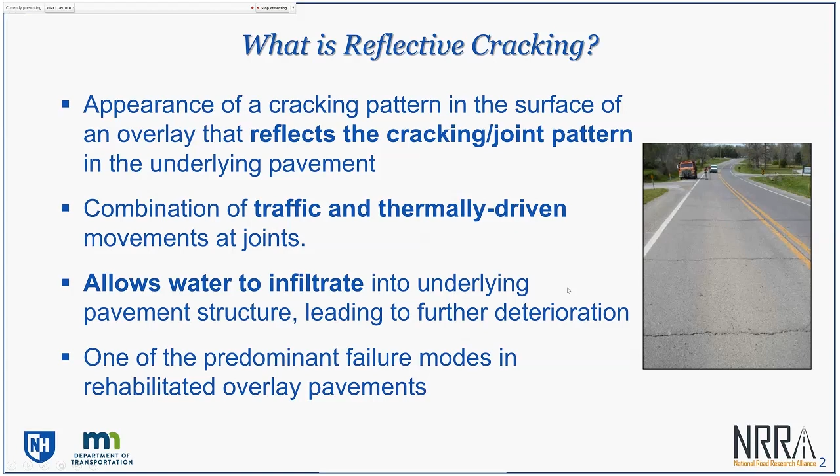So that is really what we are trying to address.

Now, when this project was developed, there was another topic that the flexible team was also looking at, and that is tied to in situ density of asphalt mixtures. What ended up happening was, because of the way the test sections are constructed at MnROAD, and also since there's quite an extensive amount of performance testing that has already been conducted on these mixtures, it was decided...

...that really both of these objectives, not only the objective on selection or decision tree for overlay selection and reflective cracking performance, but also the objective in terms of how in-place density of asphalt mixtures impacts their performance, including trying some of the newer volumetric concepts to get better densities in our asphalt mixtures, those two really merged and ended up being this single project in which we are looking at both of these things simultaneously. And as we go through this presentation, you'll see how we are doing that assessment.

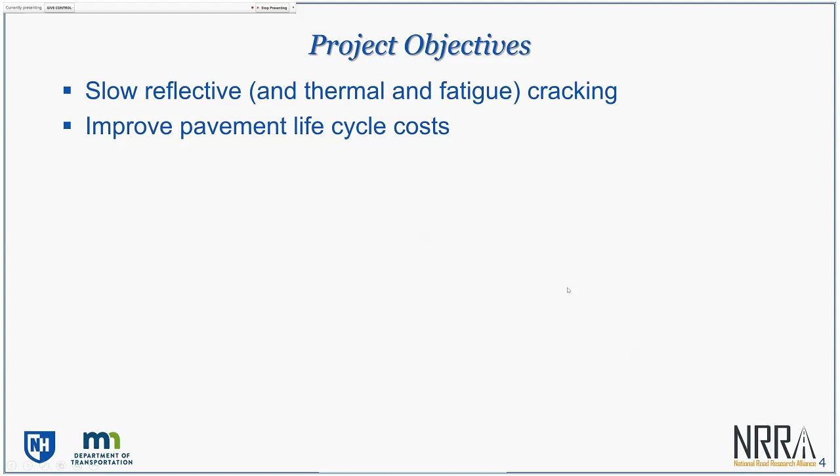So overall objectives, and I've already touched on these. Obviously, we want to get better reflective cracking performance from our overlays. And the consequence of that would be an improvement in pavement life cycle cost, which is tremendously important in today's economic climate in terms of agency budgets, where we are constantly trying to stretch our investment as far as possible.

But on top of that, there are also multiple side benefits or additional objectives that this study focuses on. One of them is looking at what kind of laboratory-based performance tests are able to better capture reflective cracking performance. Obviously, there's already multiple efforts throughout the US on performance tests, including the MnROAD NCAT partnership, which is also looking at cracking performance tests, as well as rutting and other distresses.

But since in this project there was already a component that dealt with doing extensive lab performance testing by all the different agencies and associates, it was considered that since we are going to have field data, we might as well do this comparison and develop additional knowledge through that. We will also be looking at constructability considerations and time considerations, especially in context of various performance tests. So that's another side advantage, where we are collecting data on how long it takes, what's the turnaround time on some of these tests, and so on.

Again, this is not a unique effort, as you are most likely very familiar at a national and international level. There are a number of studies doing this. We are just trying to provide additional information on these topics since we have access to the data.

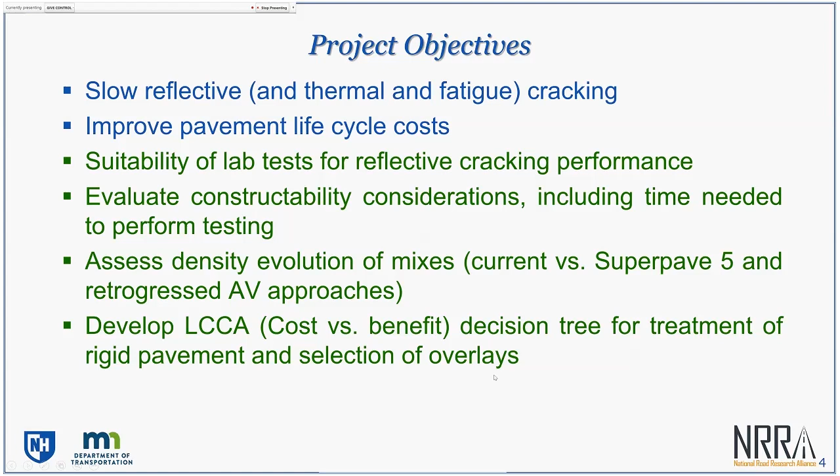And then lastly, as I mentioned before, the overall outcome is really going to be a decision tree tool that agencies can adopt, where it takes as input your existing pavement condition and gives you different scenarios. So if I choose this material and this thickness, what is really my life cycle cost associated with that overlay decision? That's really the outcome, and that's why we will be working quite extensively on this project in the second and third year, developing performance curves that various pavement management systems can adopt. So those are the objectives.

I'll very quickly go through pavement sections and materials. I won't spend too much time on it because many of you have seen this information before. But essentially, there are 12 different sections that are part of this study. And really what is changing between those sections, there are multiple things, but the key things that are changing between these sections are your overlays.

They are changing in terms of thicknesses, also in terms of mixes—not just air void levels, but also to some extent different gradations. Several of these sections also have interlayer treatments or another asphalt layer between the traditional overlay mix and the concrete slab, and construction technique as well, where several were constructed using a spray paver, doing a thin bonded overlay type of construction technique, where you can get a higher tack coat application.

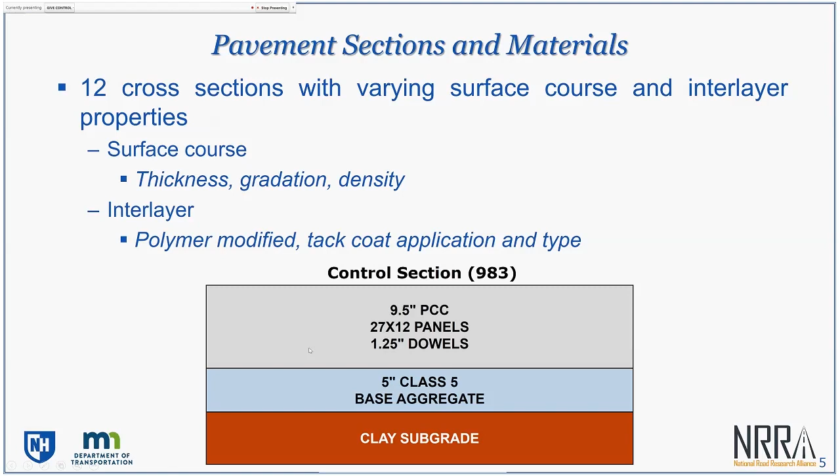One thing that's wonderful with the MnROAD facility and through this NRRA effort is that we have excellent documentation of pavement conditions. We already have load transfer efficiencies before construction, and distress surveys before construction, and then obviously these sections get monitored. That's really what's helping us develop these decision trees, because without that kind of information, we won't be able to do it. So there are various cells, and I have them grouped in a way.

The first cell is what I call my baseline overlay type of cell: 2.5 inches of 19 millimeter mix right on concrete, then 1.5 inches of wear course, which is 9.5 millimeters, so 4 inches total overlay thickness—that's what we use more as a baseline or control overlay. Then to compare to that, you see 4 more cells here.

What's really changing between these cells—if you see the course going right on top of concrete, they are all 2.25 inch, that's not really changing. But on the surface you can see 4 different mixes, where now we have our traditional 1/2-inch mix with 4% air void design level—that's your standard Superpave mix. Then cell 989, the only difference is instead of that standard Superpave mix, this one's designed as a Superpave 5 mix.

The Superpave 5 mix is designed to have a 5% air void level, and in-place air voids also around 5% at the time of construction, as opposed to a typical 92% or 93%, meaning a 7 or 8% air void level. So higher in-place density at the time of construction, but higher air void level as a design mix.

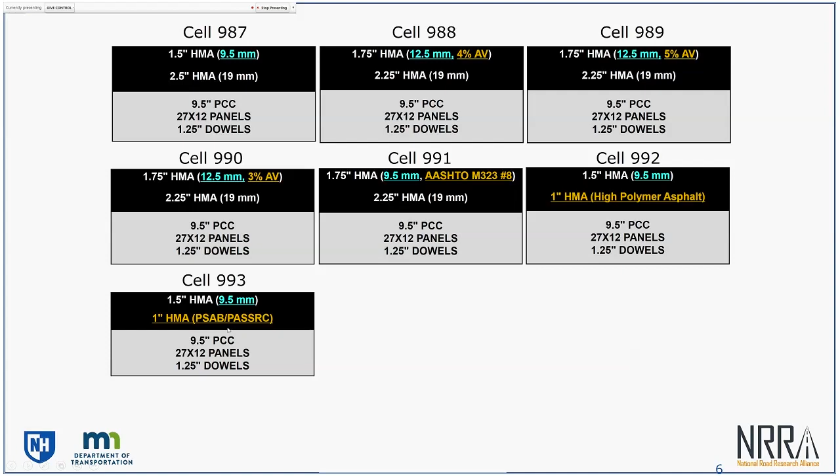Then the next four—984, 985, 986, and 994—are all actually focusing on tack coat and construction technique, where they are all 1.5-inch overlays but placed with different application of the tack coat between the concrete and asphalt layers. In the case of 986, that one is actually placed with a spray paver doing a thin bonded overlay, or a bonded overlay with a high shot rate on the tack coat emulsion of 0.1 gallons per square yard, versus 984 which is a more traditional shot rate of 0.08, and 985 a lower than traditional rate of 0.05—these are undiluted rates, rather diluted rates, so the actual emulsion amount is even lower, but this is with dilution.

Lastly, cell 995 is a true ultra-thin bonded wear course with a very high tack coat rate of 0.2 gallons per square yard. In that case, the tack coat is also a polymer modified emulsion, made with polymer modified binder. So those are the different cells, and that's going to help us populate all the information we need toward developing these decision trees.

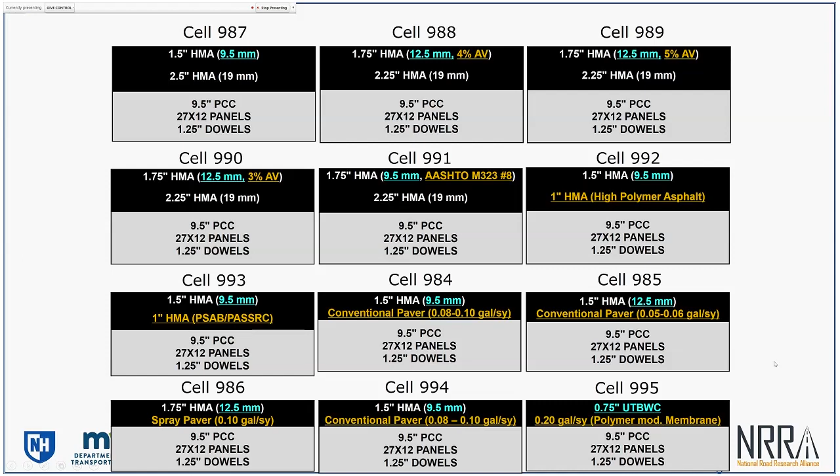This research task is really 8 different tasks. We are still in the early part of the project. We finished the literature review and submitted it. You can access it on the NRRA website.

Task 2, we are collecting data on performance of these overlays. We already have lab testing data from all the different partners who have tested these mixes.

Task 3, we have started groundwork on it. Officially it kicks off at the start of next year, and that's where we will be making mechanistic models of these overlays, then calibrate those models using MnROAD data to make sure they are reliable. Then we will be able to run a lot of what-if scenarios, like what if I increase my overlay thickness by half an inch, or reduce it by half an inch but use some kind of polymer modified mix, and so on.

So that's where we will develop a large enough data set to feed into tasks 5, 6, and 7, which is where the decision tree essentially gets developed. Task 5 is the critical one, and 6 and 7 are more about building tools that use that knowledge.

Task 4 is the side, or parallel, project where we are really looking at, for these mixes—especially ones designed differently than the traditional Superpave approach—how asphalt density changes with time, and what impact that has on reflective cracking performance.

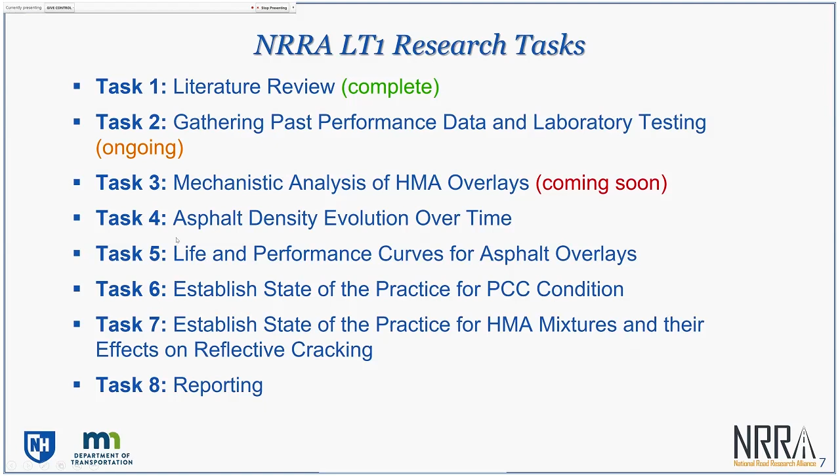On the literature review, I won't spend a lot of time. As I said, we've already submitted this to the flexible team, and you can go online to learn more about it. We looked at all the different models and tests out there for reflective cracking, and also did quite an extensive review of what these enhanced density approaches are doing.

We reported on work done extensively in Indiana, where they are seeing very good responses with the Superpave 5 approach in terms of pavement performance—not just for cracking, but also from a durability perspective.

Reflective cracking, as we know through Pavement ME and the associated NCHRP project, is a challenging problem that requires a quite extensive mechanistic approach to simulate and predict performance reliably. So we are taking approaches similar to what was done in the initial development of Pavement ME, with certain variations. I don't have time to go into those in this presentation, but I'd be happy to discuss if you have questions or want to contact me.

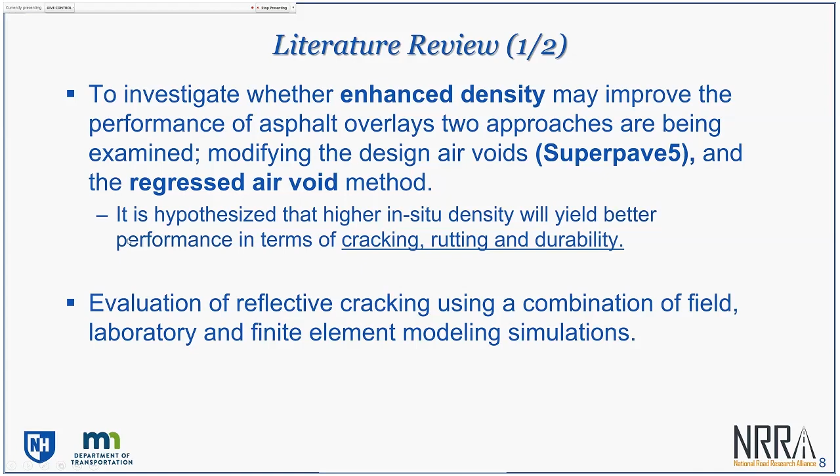On the LCCA side, as you're probably familiar, there's been a lot of recent work on this topic—especially kicked off by the NCHRP 1-45 study, which showed that vehicle fuel efficiency depends extensively on pavement roughness. Our approach here is to start with FHWA's RealCost software, which allows us to incorporate all the different effects.

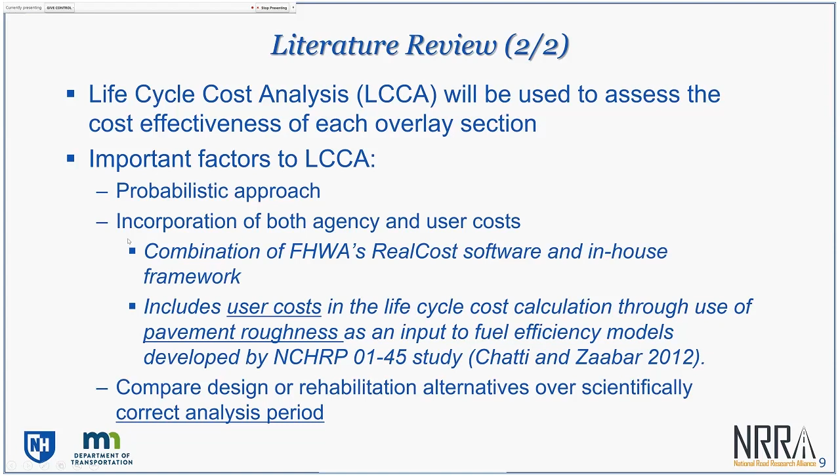We're also keeping track of cutting-edge research on this topic, and we have internal projects going on as well that give us a better handle on user cost—things like user delays, crash propensities, lost revenue for businesses, and so on. So we will be bringing those components into the LCCA module as well.

Just a quick list of all the different mix tests that have been conducted on these asphalt mixtures at MnROAD. Again, this is something you've probably seen before, since Ben and others have presented this information multiple times to people interested in NRRA activities.

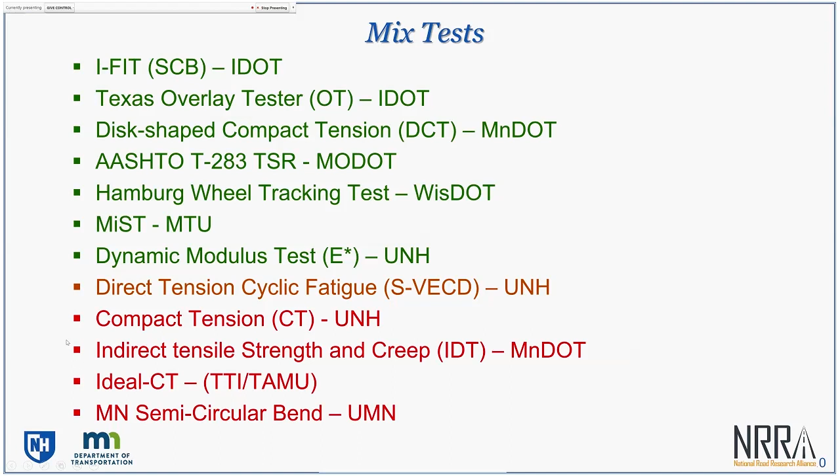To bring things up to speed: everything shown in green is already tested—we have data. Things in orange are currently being tested, and there are certain additional tests that got added later on, so we will be receiving some of those results. The UNH one is part of our contract, so we will be doing that; the others depend on how much time, mix, and availability there is for agencies and associates. They may or may not happen.

For how we are comparing these mixes to performance, and also mix performance properties to mix properties such as volumetrics, we are relying on statistics—specifically a technique using Pearson's correlation coefficient, or Pearson's correlation matrix approach.

It's really a very simple technique that statistically looks at what impact one category of variable has on another category of variable. For example, what impact effective binder content has on any of the performance properties we saw on the previous slide. It's very straightforward: if your correlation coefficient is positive, that means as X increases, Y also increases, and vice versa. Zero means there's no correlation between those two properties.

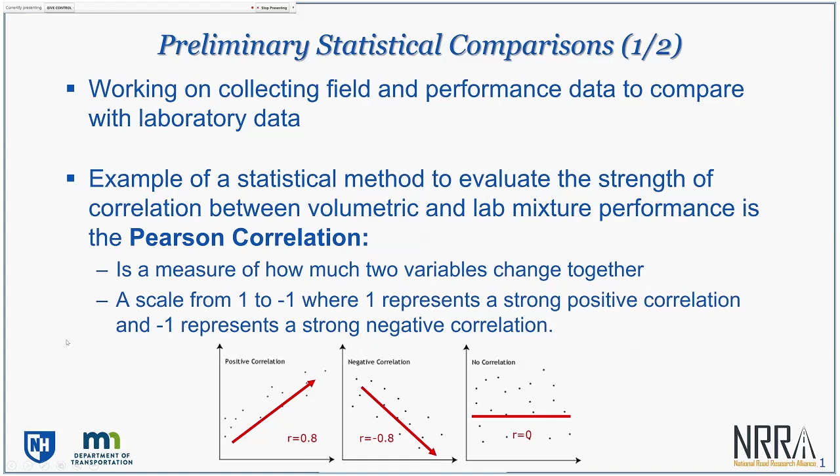These are very early results. I don't want you to get bogged down on all these numbers on the slide. I'll just focus on some of the key points I have at the bottom of the slide.

If we look at effective binder content, as this property increases, what we are seeing is that in general overlay tester results and indirect tensile strength - this is ITS at 25C from TSR, not the Superpave IDT at low temperature - those properties are decreasing. So that's somewhat counterintuitive, because typically you'd expect higher binder content to have better performance.

What we are also seeing is tests for durability, such as MIST and TSR, increase with binder content - not necessarily surprising. Also things like DCT fracture energy and Hamburg results on rutting were both improving with increasing effective binder content.

On the air void side, we saw that increasing air void was resulting in lowering of your durability, which also makes sense, but also lowering of your fracture energy, versus on the overlay tester side, increasing air void was resulting in improving of overlay test results and indirect tensile strengths.

That's fairly early, so I don't want to spend too much time on those, because really what we will be doing is making these type of comparisons between field performance and these properties, rather than these properties and volumetrics only. I just have a couple more minutes and a few more slides, so I'll go through these fairly quickly, but just some more results from the lab.

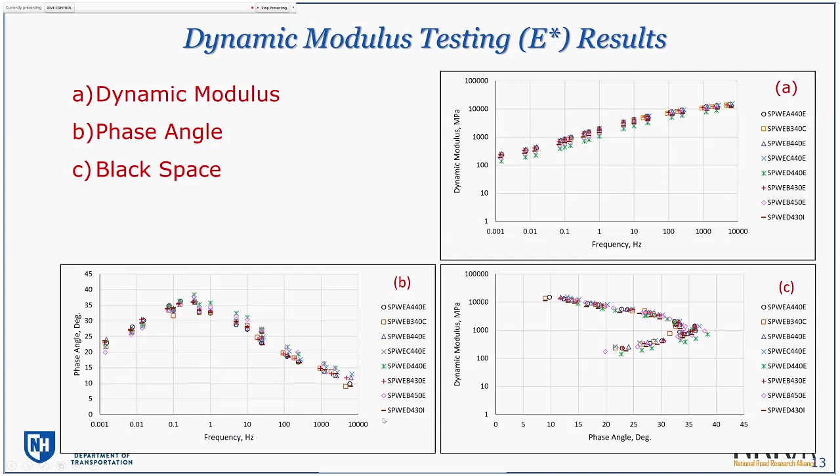So what I'm showing you here are dynamic modulus or complex modulus results. This is just to demonstrate the extent of data that we have. I'm not really trying to make any points here.

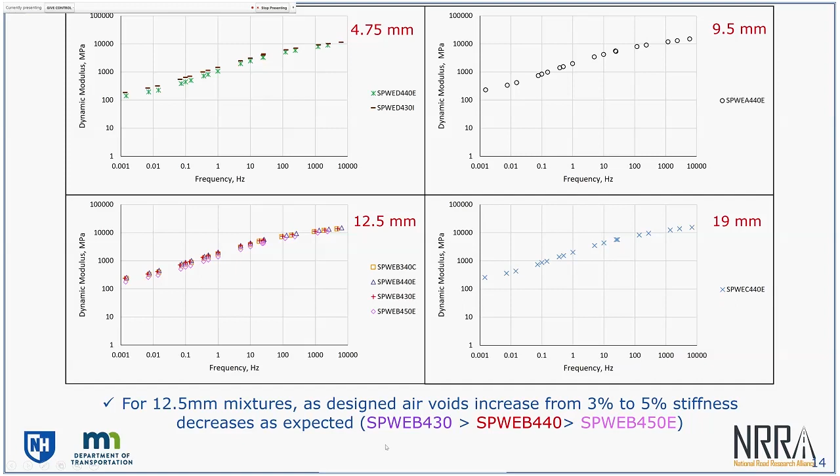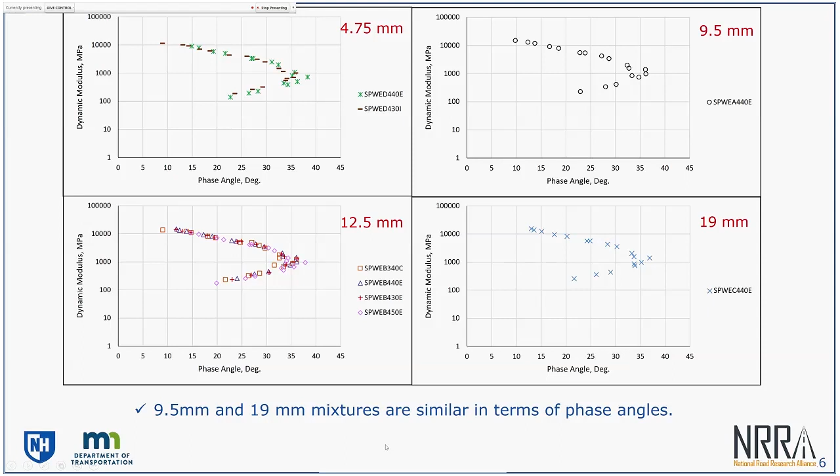We are also using tools like Black Space, which FHWA has recently started to promote for use in performance-related specifications. This is really a good way to look at full linear viscoelastic characterization of mixes. Again, this is more for demonstrating the breadth of the data. I am not trying to make any specific conclusions on this one slide, but it allows us to look at all this data in different ways.

So just wrapping up, what are we doing now? Right now we have a survey out to all the pooled fund states that are members of NRRA, and what we are trying to collect is all the information we can get in terms of how they currently design their overlays or decisions they use. If they have any performance data, we will need cost data for life cycle cost analysis, and also getting more information on their correct contact people, because it's not usually the same person who has answers to the first three items here. So we are also collecting that.

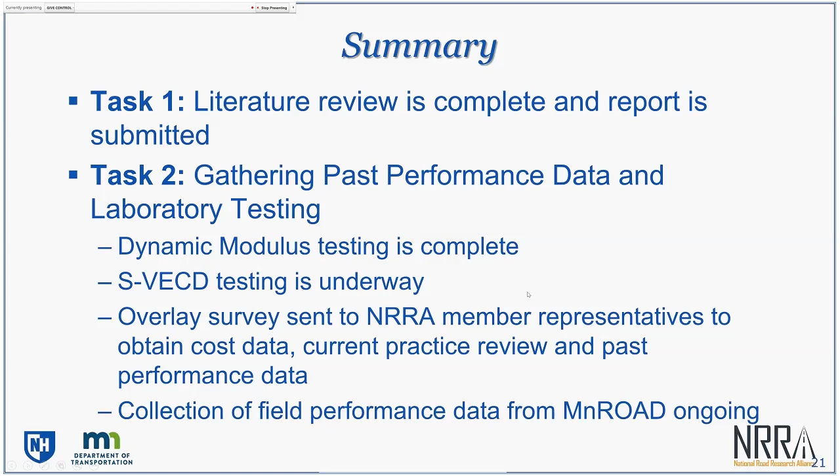Anybody in the room? And I did get a note from Dave Van Deusen, so I do have a correction that I'll make in the map with different cells. So we'll take care of that. Thank you, Dave, that's pretty good. You can read your emails while you talk. Yeah, try to. Multi-talented guy.

I guess, again, just to kind of highlight what you said, Eshan: this study and other studies that NRRA is doing is trying to not only utilize MnROAD data, but also get at the whole aspect of what states are doing, and that's where the surveys come in. It's important to get that information to make this study as good as it can be. So just kind of backing up Eshan, that request for data is very important. Thank you very much.

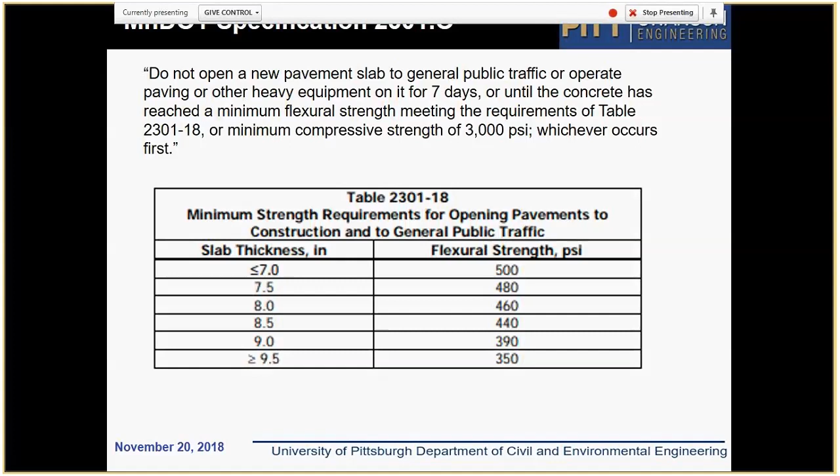Let me start by reminding you that the current spec says the pavement can be opened to traffic when the concrete reaches 3,000 psi compressive strength, or flexural strength from 350 to 500 psi, or 7 days. But basically these criteria are overly conservative. We know it, and actually the American Concrete Pavement Association proposed different guidelines, saying that especially for low-volume traffic and strong subgrade, you can have a flexural strength of 300 psi and that should do the work. But all the previous work was done with old mixes, and there was very little experimental verification for that, especially full-scale verification.

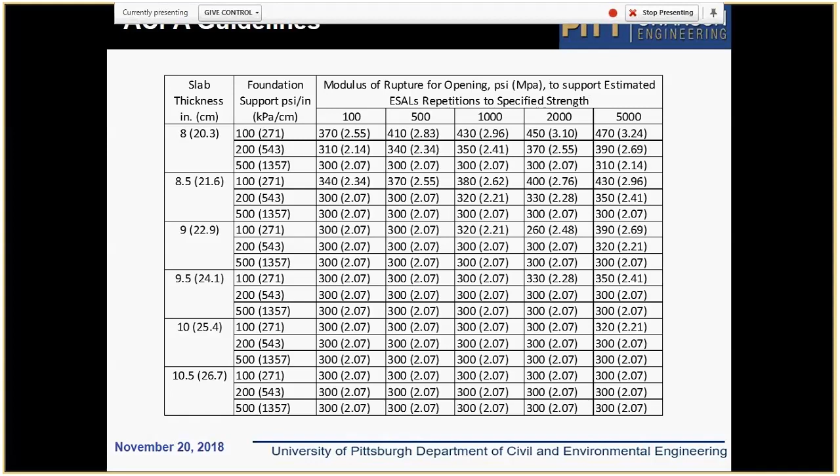So that brought us to this study initiated by the RIGID team. The objective is to evaluate visible and invisible distresses, both short-term and long-term, that result from early opening of concrete pavements; quantify the effect of early loading on long-term performance; and most importantly, determine minimum strength at opening, or other procedures that can be used to guide practitioners on early opening, and recommend strategies for minimizing or avoiding early loading damage.

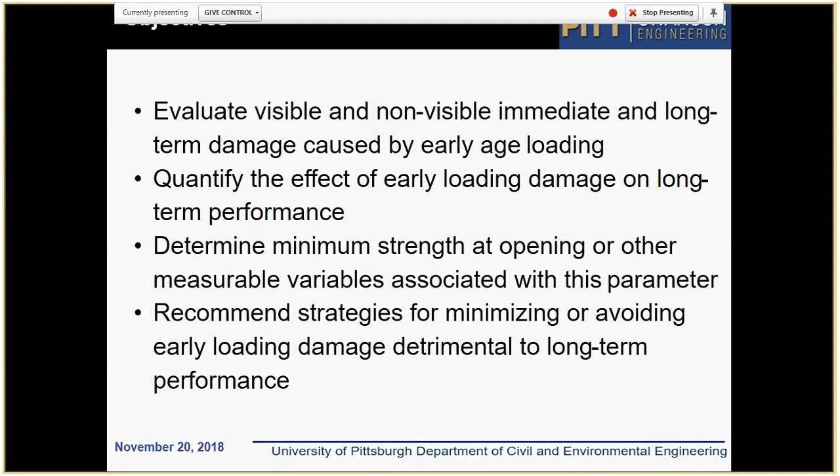For example, limit early loading to certain type of traffic, and postpone heavy vehicle loading to the later day, and specify how long the pavement should be closed for heavy traffic.

Naturally, there are many potential benefits from this project. First of all, it will reduce construction time and cost if we update the criteria and make them less conservative. We improve user satisfaction, because longer construction time causes user delay and frustration.

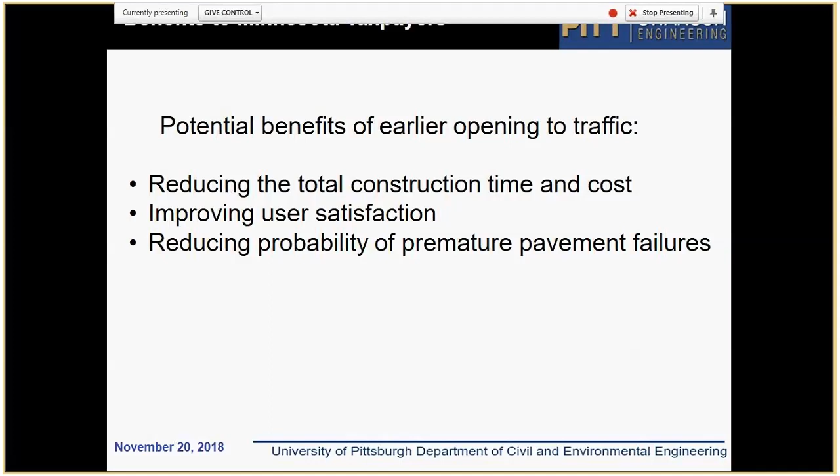But on the other hand, we should not jeopardize long-term performance, and our recommendations should be valid enough, so that we eliminate premature failure related to overloading at early ages.

As Ben mentioned, at MnROAD, cell 24 was reconstructed, and several test sections were created, all of which have the same thickness and the same dowel design, 1-inch dowels. They're built on 6-inch thick granular base and on sand subgrade. But what differs is how they were loaded.

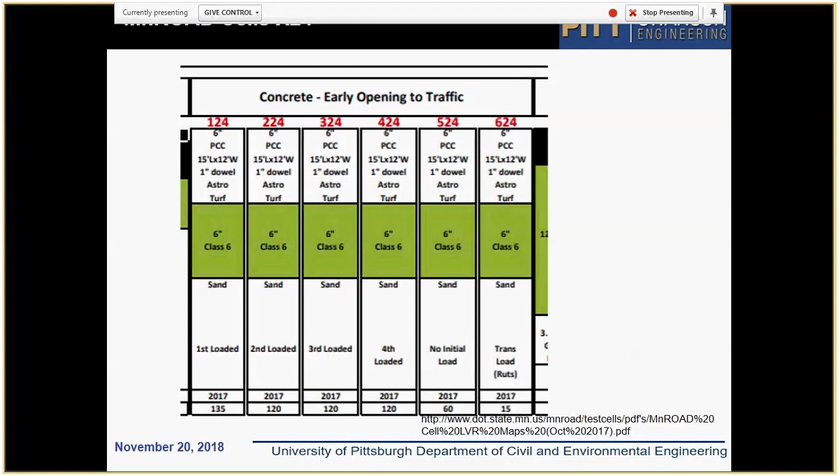Before I move on, all of them have standard slab size, 12 foot standard width and 15 foot joint spacing. It uses standard concrete mix.

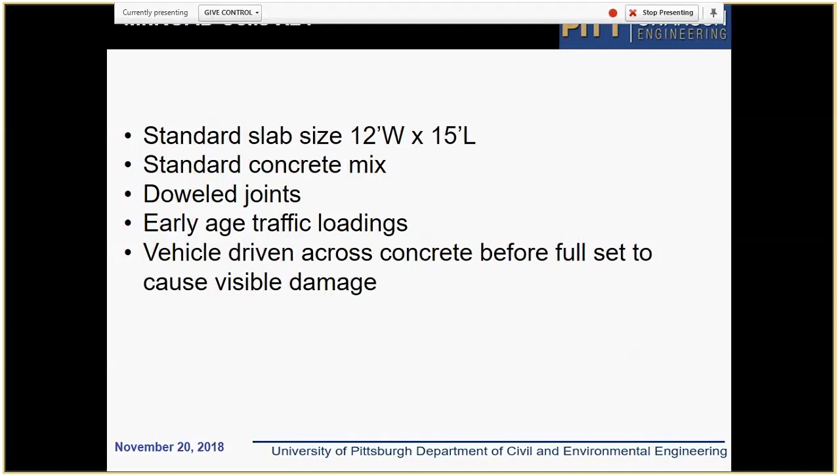For one cell, the vehicle was driven across the pavement while concrete was still plastic, and that caused visible damage. Four sections were loaded at early age, but after concrete was set, and one section was left as a control section.

Two types of vehicles: snow plow and two-axle pickup truck. This slide shows the loading pattern.

First, cell 124 was loaded, and the vehicles moved back and forth. After that, both cell 124 and 224 were loaded, again the vehicle moved back and forth, then 324, and in the fourth loading, all the sections from 124 to 424 were loaded.

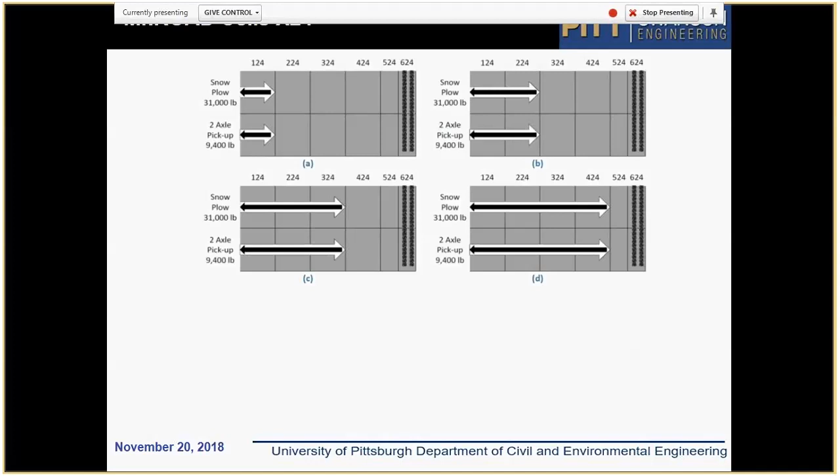I need to mention that the sections were constructed from west to east, from 624 to 124, so that at the time when section 124 was loaded, the concrete was actually much more mature than at the same time for section 424.

This slide shows the pavement age at the time of loading, measured in hours. Section 124 was loaded 3 hours after concrete placement, and section 424 was loaded about 11 hours after concrete placement.

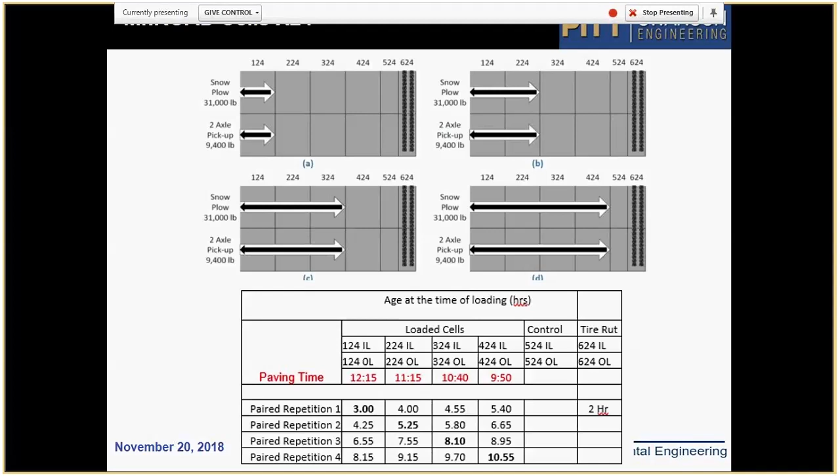But even 11 hours is a pretty early age of loading.

Even after dealing with this data for quite a while, I can't completely understand why section 124 is not damaged, but that's the case. One explanation I found is in a paper by Hammer et al., and later discussed by Nehdi and Soliman.

Basically, what it says is that at very early age, the concrete has very high strain capacity, so it can withstand significant strains, because stiffness is low and tensile stresses are low and tensile strength is low. But with time, stiffness increases, so strain capacity decreases while strength increases. So basically there are two factors fighting with each other.

It's also interesting to see on this slide, from a paper published about 10 years ago, that if you look at the horizontal scale, the strength is not very high even after 10-12 hours after concrete mixing, so basically about 4-6 hours after placement, I assume.

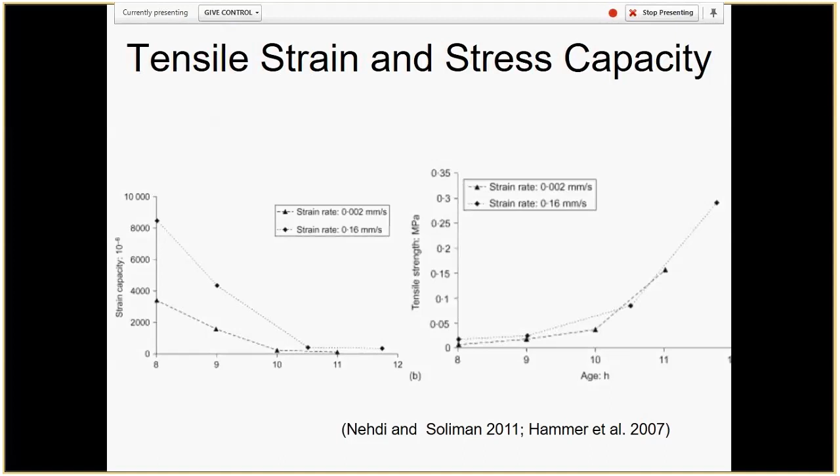It's quite possible that in that study they used a high water cement ratio because it's easy to work with in the lab, and that doesn't represent the current stiff mixes used with slip form paving.

Under this project, we reviewed the data provided to us from MnROAD, collected by MnROAD engineers and technicians, and tested by MnROAD or by consultants, like in this case American Engineering Testing.

That is quite interesting, because in the literature there is no agreement on which strength develops faster. About 50% of papers say compressive strength develops faster, and another 50% say flexural strength. But it looks like in these mixes the flexural strength develops faster.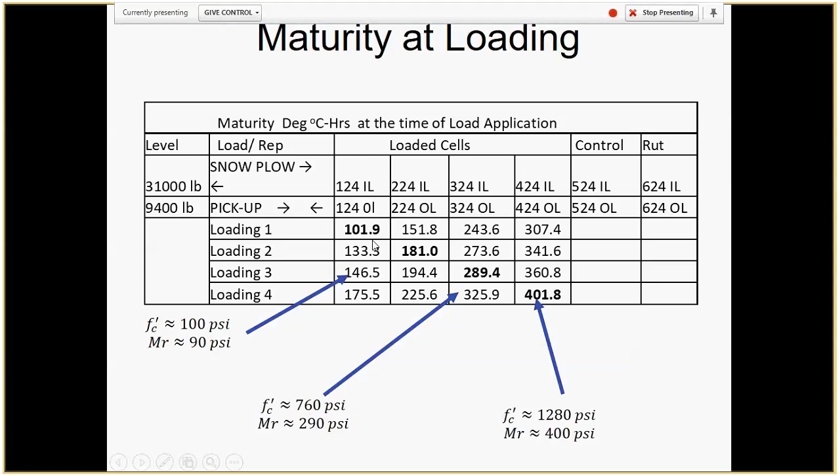And basically, it's interesting, none of them failed, but I still can't understand why 124 didn't fail. It's important to point out that the first loadings were made at the maturity level for which we even don't have reliable tensile and compressive strength. So basically, after that, we re-evaluated dynamic strain responses.

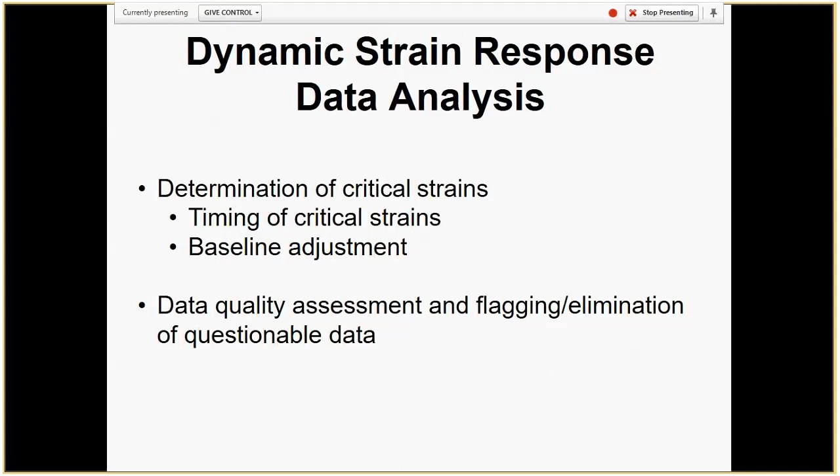Provided to us by MnDOT, and basically we came up with similar conclusions to what was achieved by MnDOT, but with some exceptions. First of all, we make sure that we are not accounting for noise when we pick up maximum responses.

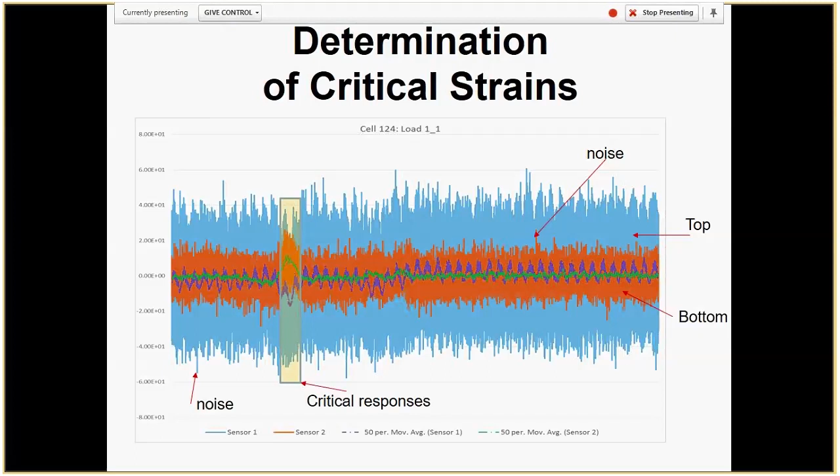So we applied several techniques, but the simplest one, we just use moving average to find the approximate window of time of maximum responses, and after that we would find the maximum response in that area and subtract the baseline. Second, we reviewed the data and variability in data and found that if the standard deviation is more than 80 microstrain, then most likely the data are not reliable.

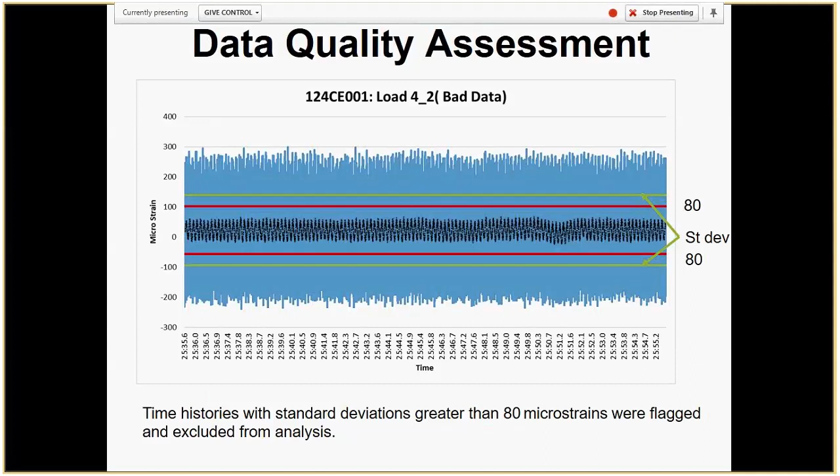So in this case, it's an example of pretty good data. The standard deviation of the data is much lower than 80, and in this case, you can see pretty bad data. So they're not quite reliable, and we decided not to use this data.

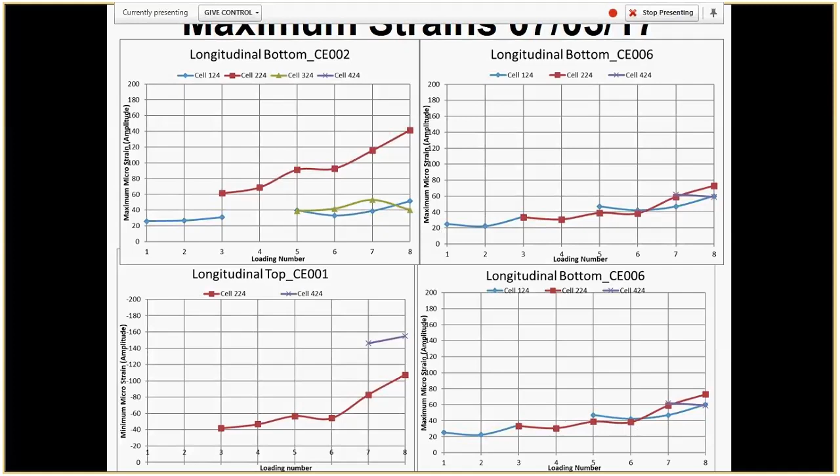So in this case, the longitudinal strains and transverse strains have the same trend. 224 shows the highest increase, but definitely no damage. Here I would like to point out that when the measurements were taken, it was before saw cutting, so basically the behavior is slightly different than after joints are formed.

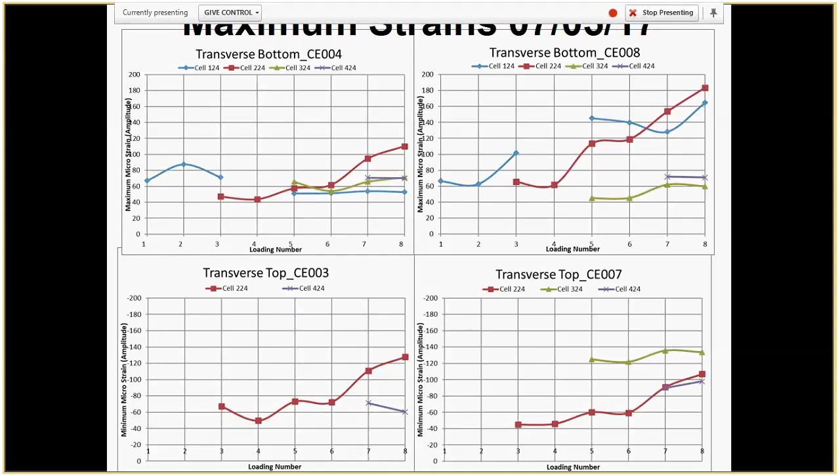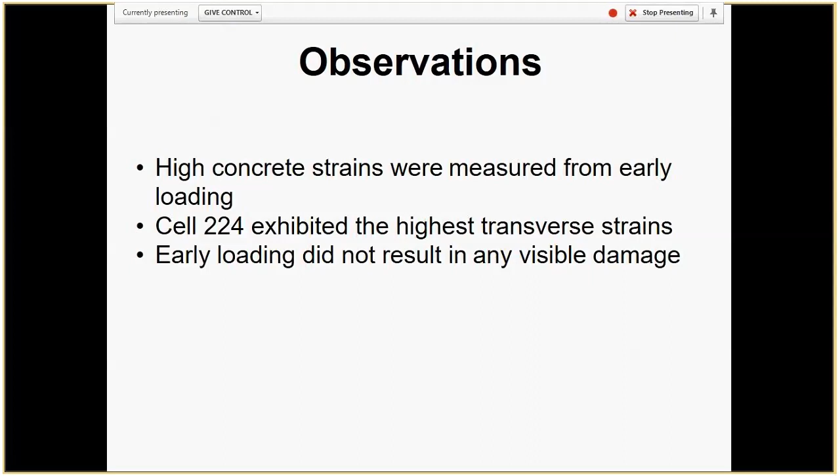But basically our conclusion was that very high concrete strains were measured, and here we even excluded questionable data that might have much higher strains, but those strains did not lead to significant damage, and the explanation is that stiffness was reasonably low and tensile strength was quite high. So basically, if criteria should be used for the opening, it shouldn't be compressive strength, it should be tensile strength. And if compressive strength is used, it's only a way to estimate tensile strength.

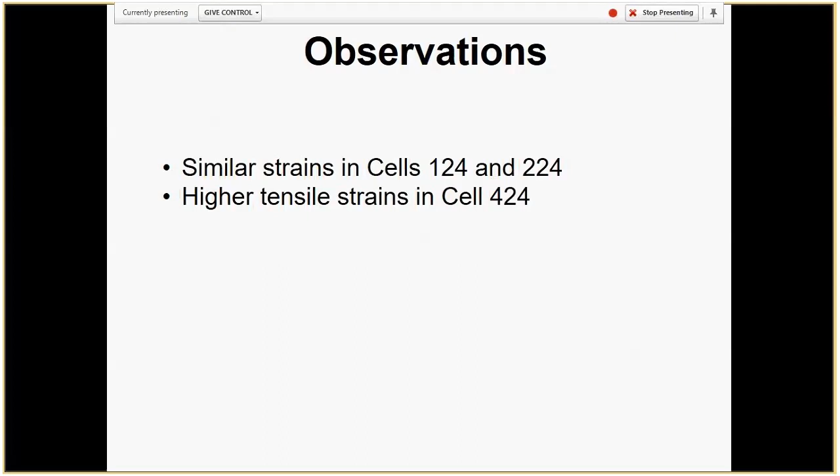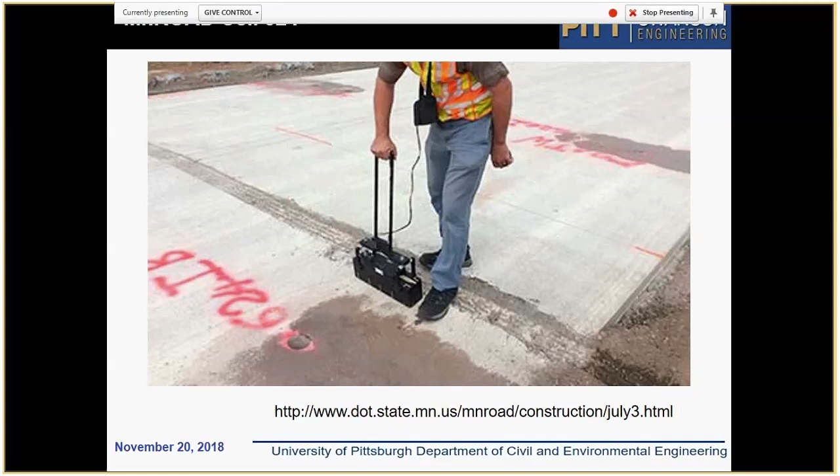We also evaluated ultrasound tomography data collected by Dr. Hoegh for us. And first of all, we evaluated shear wave velocity, and the values we obtained confirm the estimates we got from previous studies, that basically concrete stiffness after 24 hours was where we would expect it to be. Its velocity is about 2.4 kilometers per second, which means that the tensile strength was most likely about 400 plus psi.

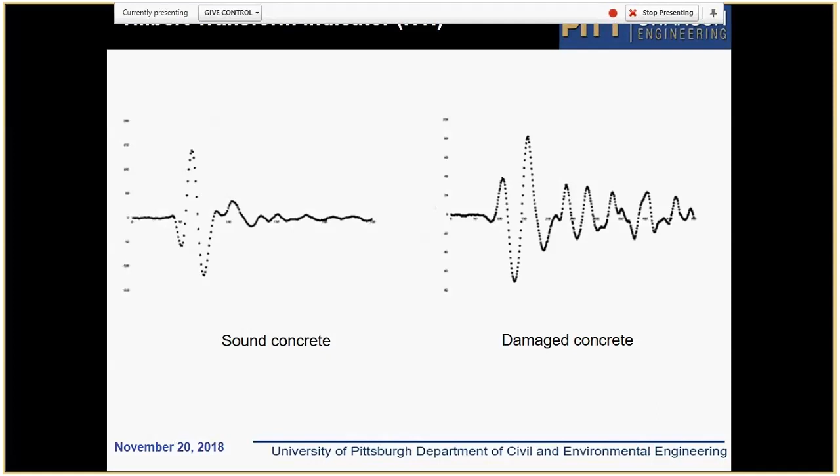That corresponds to maturity measurements, and stiffness was about a couple million psi at that time. We also tried to evaluate damage within the concrete, and we used the technique we developed previously for old concrete. In this case, we take an envelope of the signal, make certain transformations, and calculate an area under the curve.

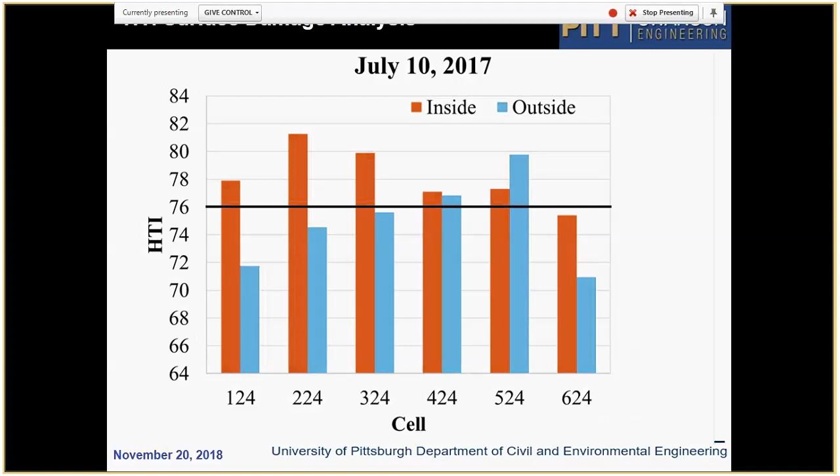So higher damage index means greater damage in concrete, because it means that the signal is more distorted. In this case, we found that control cell 624 does have slightly lower damage, but the damage for all cells was not very high. Maybe there's an exception inside lane for 224, but even that one, we're not sure how confident we are.

And if you look at the maximum index, there are several occasions for which it was quite significant. That's again for cell 224 and for outside lane of 424. But at the same time, 524, when measurements were taken close to the rut created by the truck, were naturally in worse shape.

But still, at this stage, we can't say that this damage is caused by early loading and not by, let's say, poor consolidation of concrete. Not poor, but maybe less than desirable.

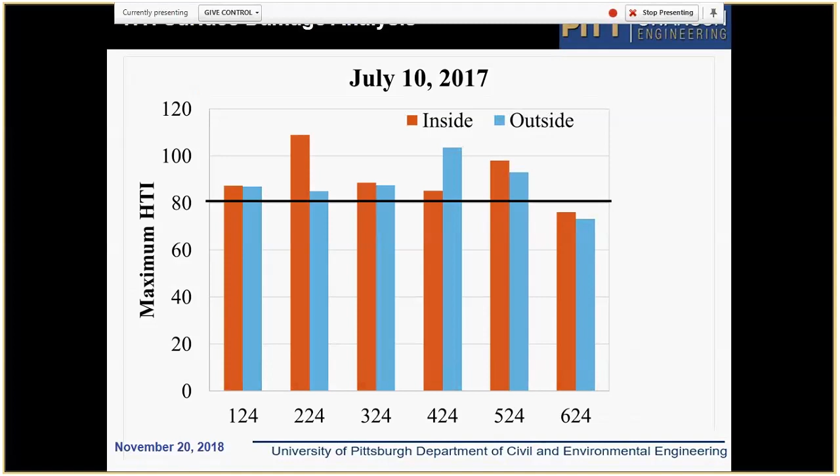So we are still working on revising this index, and the reason why we're not confident this time is because when we review the data more carefully, we found that the analysis we applied may not be adequate for cases when velocity is much lower than for mature concrete. The index was developed for velocities about 2.6 to 2.8 kilometers per second. Now we have 2.4, and that might have an effect, so we might need to adjust it.

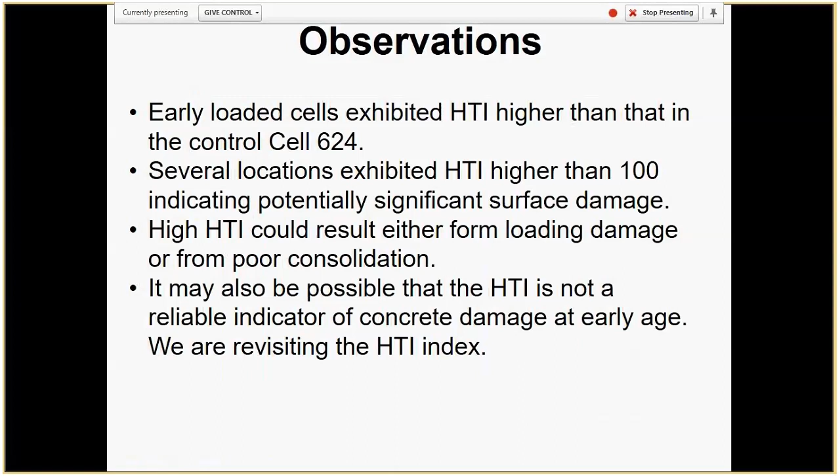So basically, at this stage we can't rule out that there is damage, but we don't have any definite answers if it's there or not.

We also looked at the deflection data, and those results are actually quite interesting. Looks like I'm running out of time, so I will show only a few results. But basically, what we've done is analyze with simple analysis, normalized deflections, and later we performed the calculation using two techniques, and we found that those results were quite strange.

First of all, the variability was higher than we expected, and second, the calculated values were higher than we would expect for a pavement of this thickness at this age. We're still trying to explain these results, and we're checking our calculations, but it looks like we're not very confident where we are.

Just a few more slides. So basically, one of the concerns we had was that early loading may damage joints. In this case, we analyzed the load transfer efficiency, and it's interesting that for inside lane that was subject to traffic after construction until this testing in October, the load transfer efficiency was about 90%, which is slightly lower than we expected for a doweled pavement at this age. But basically, it's pretty good anyway.

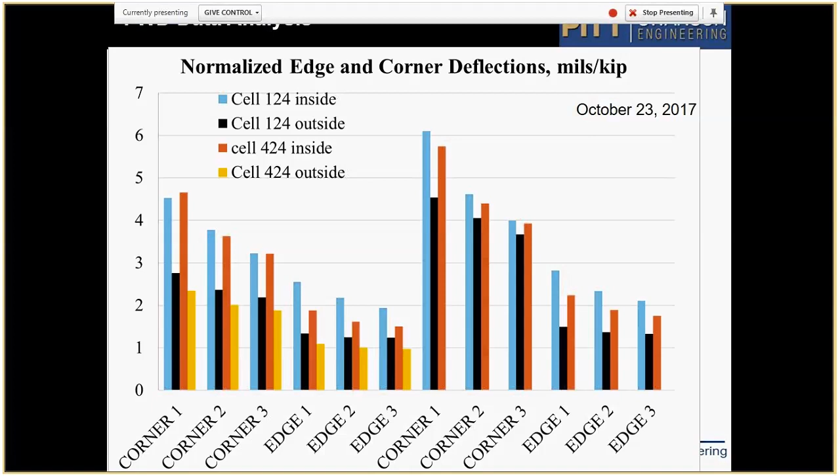So basically, that's what we've done so far. We went through the data provided to us from MnDOT. We had difficulties and we still have difficulties explaining some of them, but it looks like we're making progress out of this, and now everything is starting to make sense. The most important observation is that it looks like some of the conclusions you can find in the literature, and some of the experience people have with other mixes, are not applicable to stiff mixes that are used for slip form pavers.

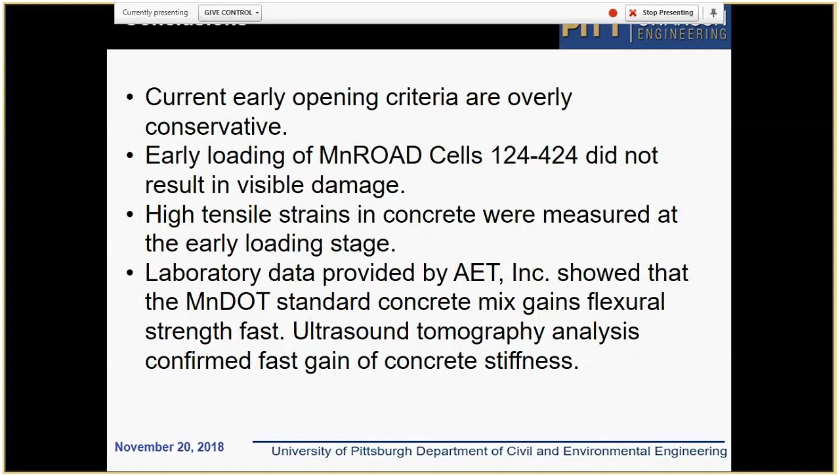And basically our conclusion is that the current guidelines are very conservative and can be relaxed. I'm not sure we would like to recommend open traffic after 3-4 hours, but definitely there is no need to wait 7 days for that, and of course the results should be maturity based or stiffness based, not time based.

But basically, to really provide reliable recommendations, we need to conduct simulations and try to explain some of the effects we observed in the field, and that will be done later on when we start adjusting our models based on the information we analyzed so far, collected at MnROAD.

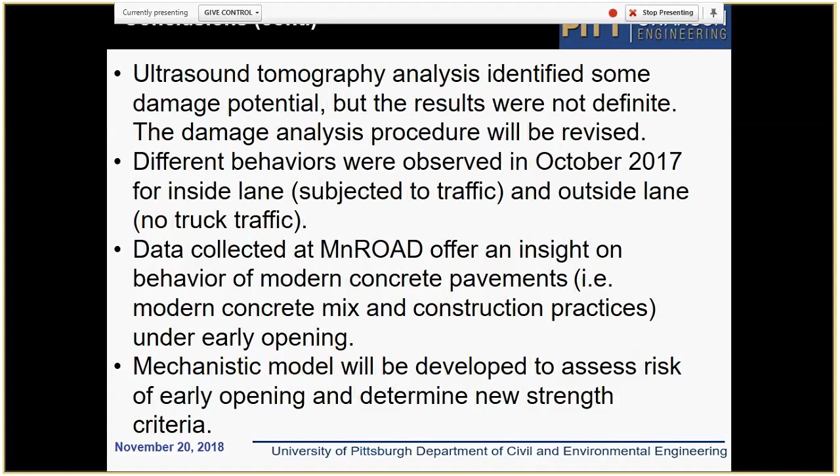That concludes my presentation. I would like to thank MnDOT for the data and the work that they've done. I would like to thank American Engineering Testing for their work on this project, on the data that we used, and NRRA, because your support is crucial for this.

That concludes my presentation. I will be happy to answer any questions you may have.

I have, alright, maybe have 1 or 2 minutes left. Yeah, thank you, Lev. Nice presentation. Bob, do you have any comments or any questions online? Don't have any online questions? Anything in the room?

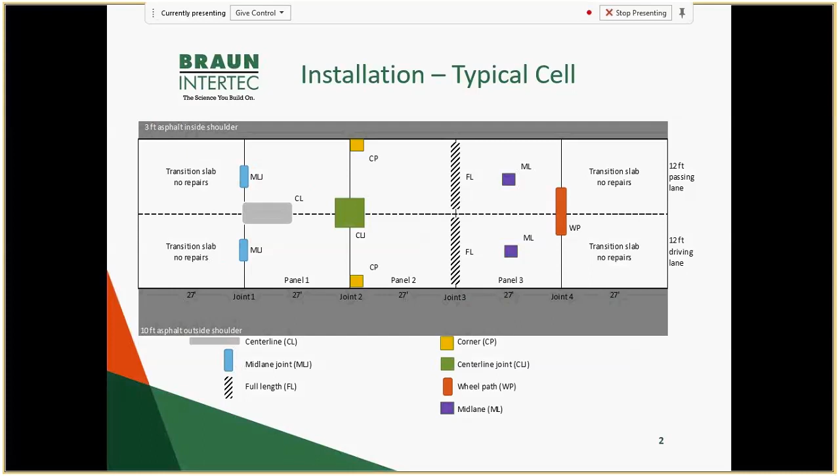So we'll get started here. This is a typical cell installation. You can see all the different types of patches. These patches were basically man-made with a milling machine, a little deeper than what we had expected, but they did a very good job of creating these different patches, either along the center line or wheel path. As you can see, there were several types.

The installation, which was back in 2017, say September, maybe early October timeframe, involved 16 different products from various suppliers. There were a couple products by the same supplier where they wanted to try a couple different things. We had everything from conventional high-early concrete, package material, epoxy products, some HMA products, and in that conventional concrete there were steel fibers to see how that performed.

So the first winter, we did a site visit about Memorial Day, and at that point one material was considered to have failed. I have a lot of pictures here - that's kind of what my presentation is, that's what really tells the story. We'll get into that in a few slides.

The other big thing was some of these epoxy products can be pretty slippery, so they put some broadcast aggregate on there. Most of that was gone on a lot of the patches after the first winter, but several patches had some drying shrinkage cracks, probably manifested shortly after it was placed. Not a big deal, but just something worth noting.

The majority, other than one product, everything looked fine - a lot of it looked like it was placed 2 or 3 weeks before this visit. So I was pretty surprised by that, and I'll have that in my wrap-up slide there, why I was surprised by that.

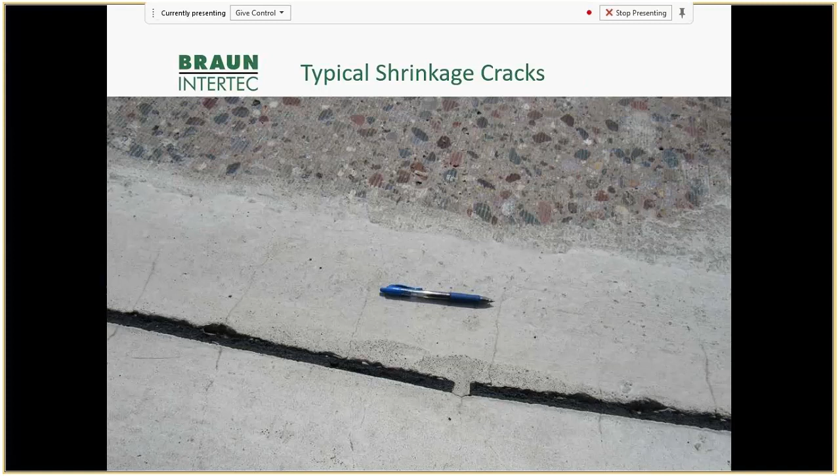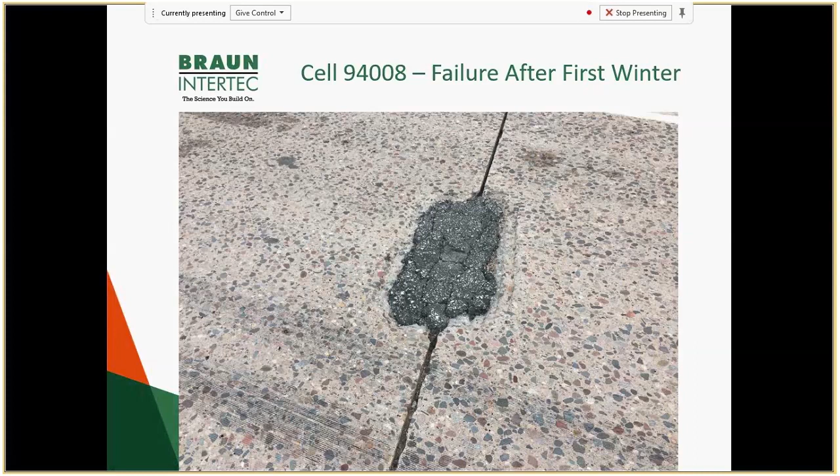But it did not survive the winter. So went back out there in June. Again, there wasn't much going on after the first winter, so not a lot to talk about there. How they look in June - again, starting to see some cracking that's not related to shrinkage cracking. Some patches are starting to spall a little bit, but on the whole it still looked fairly good. Wasn't a whole lot going on, but you can see some stuff start happening.

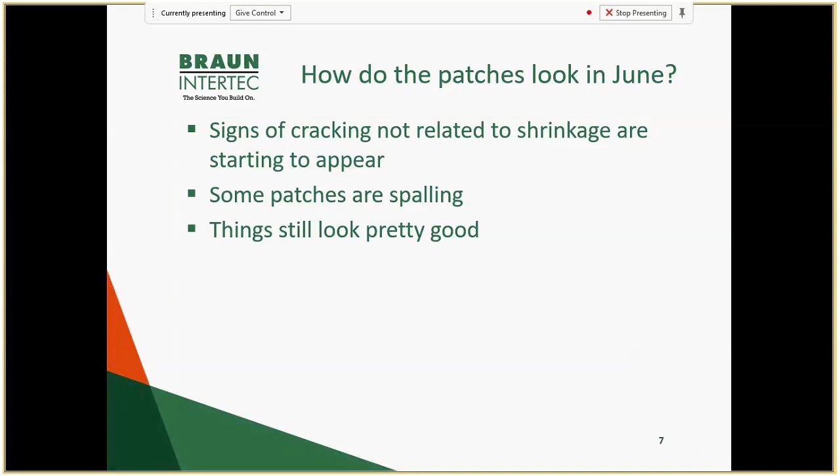But again, if you look at some of the installation pictures - and I'm going to use the term undermining - this pavement is getting pretty old. There are some pretty big voids under the pavement where it could pump. So repairing some of these joints might just be tough for some of these products. The product might be good, it just might be time for a full depth joint repair in some of these areas. And I think that's what's happening here. Again, that's kind of my opinion, my theory. But that's something we're going to watch, that there's just no support under the concrete pavement in this area.

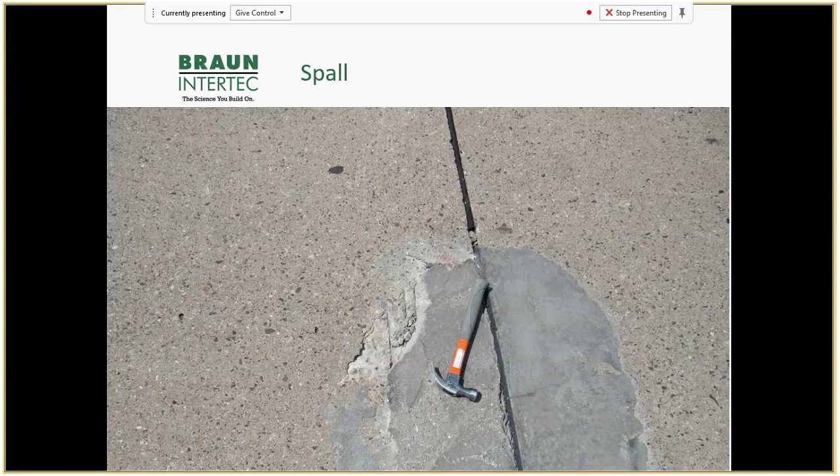And you can kind of see just a long shot there. But again, is some of this because it was feathered instead of having a nice, what I'll call thick, 90 degree or 45 degree edge. Maybe the feathering led to this deterioration. We don't know at this time, but again, from May to June, we're starting to see some stuff happening.

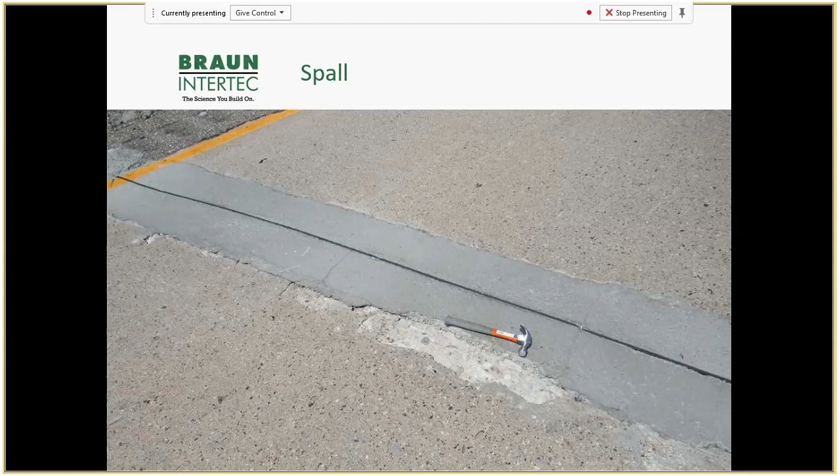How about June to September? This was the shocking one to me. As you can see here, it just kind of took off. The wheels came off, started to see a lot of failures. And these weren't small failures - these had to go out and repair the repair failures. There was some pretty big dangerous stuff going on with the size of the spall and the size of the patch, and material not being in there. So between June and September is when things really started showing and manifesting as large-scale deterioration.

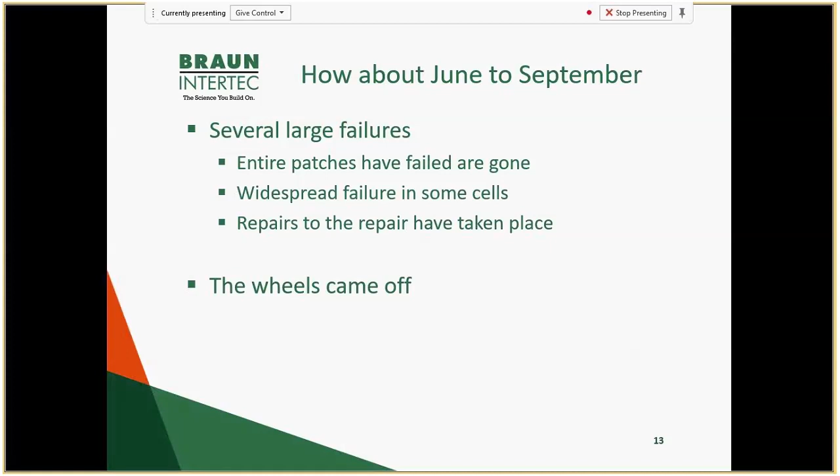And this was a really interesting one. That's a transverse joint there. Half of that patch material, it's just gone.

And when we were out there, we make a phone call and say, hey, before traffic's turned over, this one's got to be repaired. But I don't know how to explain it. Half of that's out, half of it's still in there.

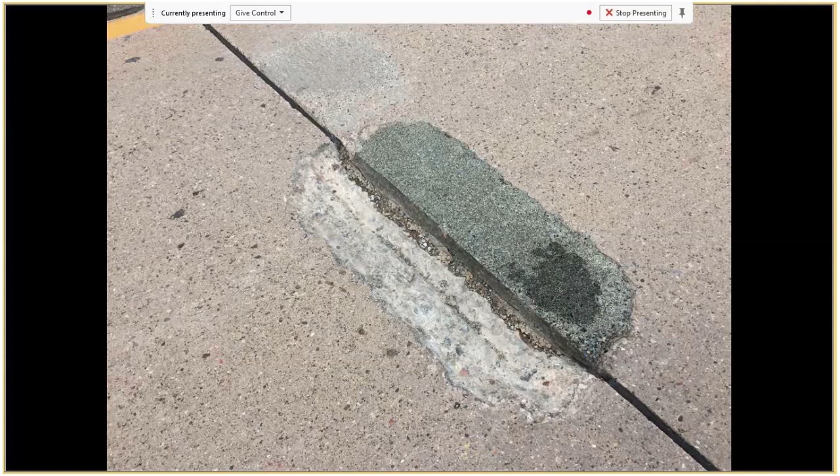That prep of that patch was exactly the same on both sides of that transverse joint, but some of that material is coming out. What this material is, basically you throw 3/8 aggregate in the patch, and then kind of think of it as a garden hose pouring epoxy into that aggregate.

The reason I'm detailing that is this is that same material, and it's almost like the epoxy is coming out of that patch, as you can kind of see that sheen on top. So again, maybe that epoxy's, for lack of a better term, leaching out of that patch, which might be why it's failing the way it is.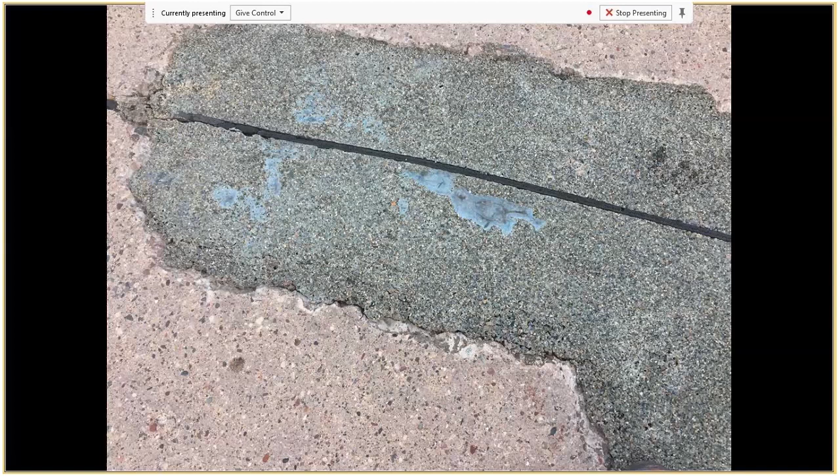And again, just some more repairs here on this product. You can see the size. It's not small pieces. We're talking half the size of the patch that's having to be repaired, that was placed in 2017. Some of this is repaired by other products that were kind of left over. This, I believe, was what Jerry calls blow patching to repair that.

So again, we just saw a lot of deterioration kick off after June. And again, wide scale repair there where the material is just no longer there.

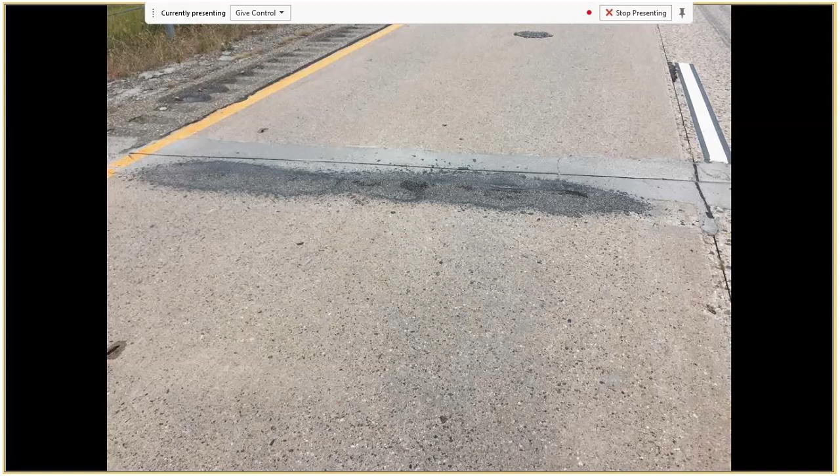So what have we, or I should maybe say I, learned so far at this point? The winter wasn't harsh for the patches. I really thought I was going to see a lot of deterioration due to obviously our winter weather and snowplow effects and things like that.

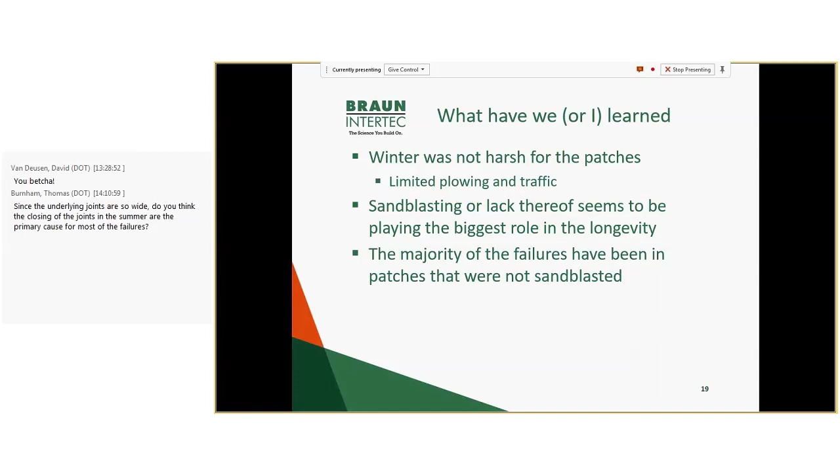And after we had a little meeting to discuss this, what we kind of came to the realization is that part of 94 is probably not snowplowed quite like the rest of the interstates. In the wintertime, there's not a lot of switchovers, so it doesn't get the plowing with our light snows or our de-icing chemicals with the light snows.

The biggest thing is a lot of these, what I'll call wholesale patch failures, I don't think it's material related as far as the material's not a good patch material. And we've documented this. The sandblasting is the biggest factor, where a lot of the failures are occurring where it was not sandblasted. So if you can kind of picture the driving lane and the passing lane, the driving lane was sandblasted for some of these cells, and the passing lane was not.

And the driving lane looks fine where it was sandblasted. But where it was not sandblasted, that's where a lot of the patches are basically coming completely out. They're not bonding to the concrete there. So again, for repair material, surface prep is one of the most important things. And we're seeing here that it does make a difference out on the road, how the surface is prepped before you apply the repair material.

And that's basically what I have so far. I could show you 100 pictures of the patches, but I tried to pick and choose what we're seeing happening and what's going on. And again, in some of them, it's nothing—it looks like the day it was placed. But as you can see, some of them have to be fully repaired.

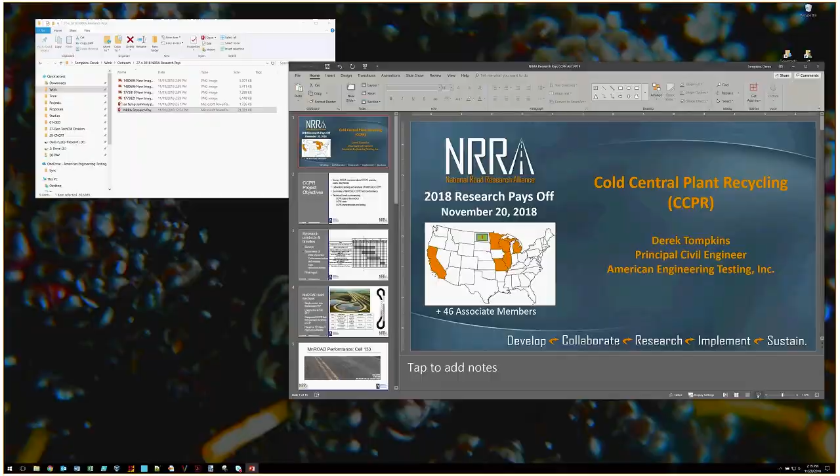My name is Derek Tompkins. I'm with American Engineering Testing, and I'm here to present a little bit about what we've done on the CCPR study. This is a longer-term study, and we've talked a little bit about it before, so I'm going to try and keep it quick and just give you some highlights of what's been done so far.

The objectives of the study are to learn more about what NRRA members want to know about CCPR in terms of practice, costs, and any needs they see in their agencies and organizations. In companion with the test cells at MnROAD, we'll perform laboratory testing here at AET, and also analysis of the field data that MnDOT and MnROAD collect from their CCPR test cells. We'll summarize that performance and produce technical briefs summarizing the state of the practice, the cost, and characterizing the performance of CCPR in terms of field performance and lab testing.

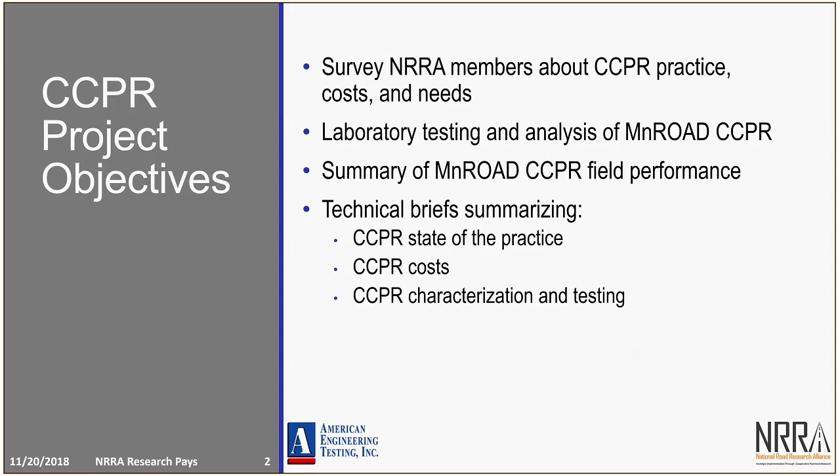An important feature of this is, that's the advantage of NRRA, is we really want input from agencies on this work. So one thing we've done is reshuffle the tasks after the first few months of the project. I worked with the TL, Dave Van Deusen, to reorder the tasks so we could get some input from NRRA members on their opinions on CCPR, or things they'd like to know about CCPR, or if they're even interested in CCPR, and applications they could see for the technology. So we moved the survey up in the project work so we could get some input from folks.

Pretty soon, as part of the Task 1 work, we came up with a draft survey that was reviewed by the TAP, and we'll distribute that to the NRRA members in a few months. The red line in this slide designates where we're at in terms of the Gantt chart.

So as we go through, we'll be evaluating test data from the field and from the lab, and then we'll be developing these technical briefs. The idea is that a good thing to come out of this project isn't just the data and analysis, but also giving NRRA some deliverables, some research products that they can distribute.

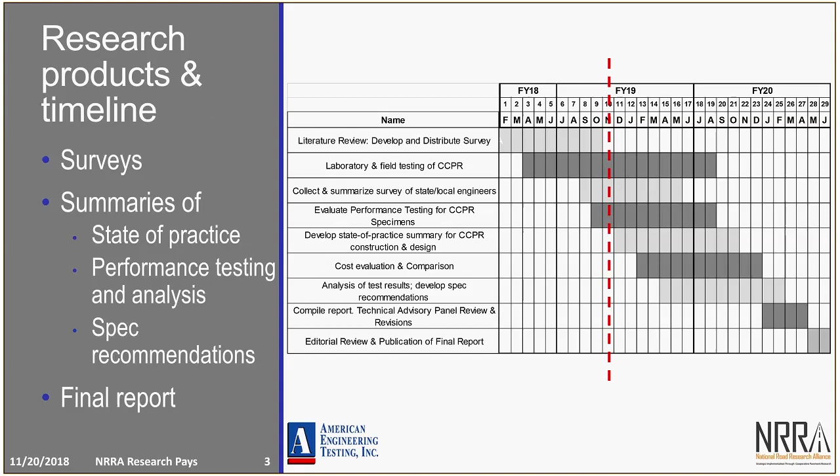One thing we've learned is that there's not a lot of CCPR-specific literature. There's the big study everybody knows about that Virginia DOT did at NCAT, but that's kind of a boutique example, a novelty. We wanted to give something hopefully a little bit broader that agencies can latch onto and maybe see their own applications in the work that NRRA will do in this study.

So the few sections at MnROAD, I think we've talked about these before. There are 4. Two have engineered emulsion, and two have foamed asphalt, and then two are surfaced with a double chip seal, and two have 1.5 inches of a hot mix.

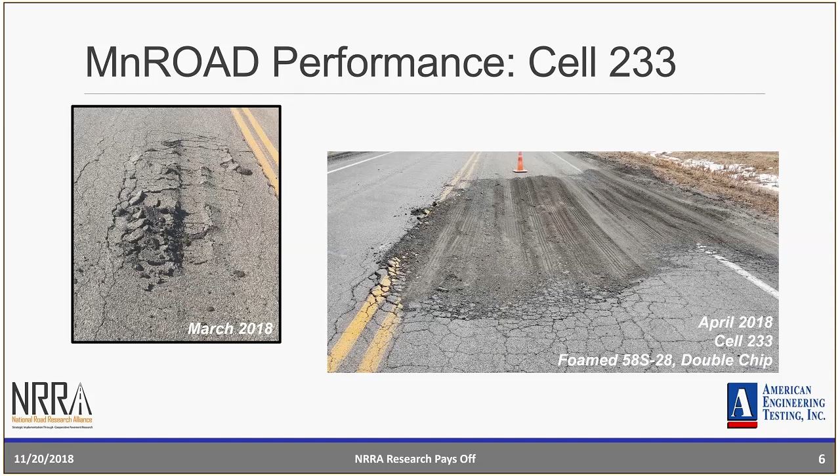We just completed the Hamburg test. We don't have formal results ready, but the test has been run, and apparently the foamed mix was failing around 3,000 to 5,000 passes, whereas the engineered emulsion was holding up for anywhere between 7,000 and 9,000. So that general rule of thumb agrees with what we see in this data.

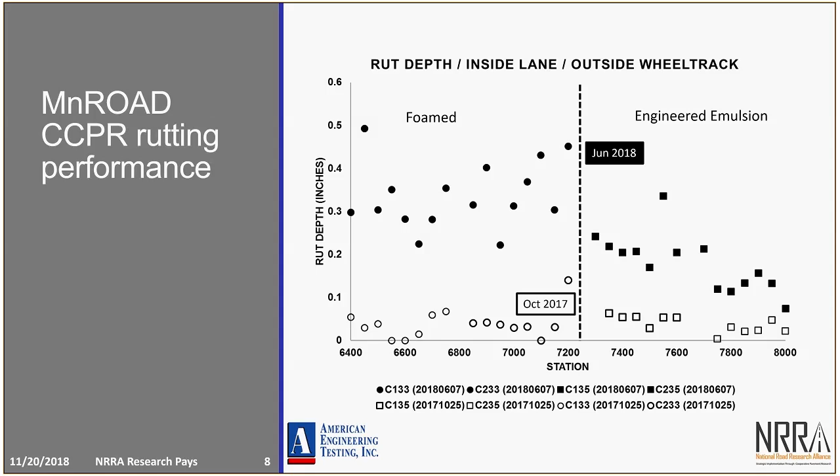For task one, we reordered the task schedule so that we could get NRRA input on the ongoing work. A lot of times in research projects, researchers disappear for two years, produce deliverables without input, working in a vacuum, then come back and give them to the TAP, who asks, did you look at this? By then it's too late, you've used up all your time. Hopefully we can avoid that issue and give people something that answers their questions and concerns.

So again, we went over the task plan and the testing plan with the TAP, modified it according to their input, finalized it, and then got ready to build specimens.

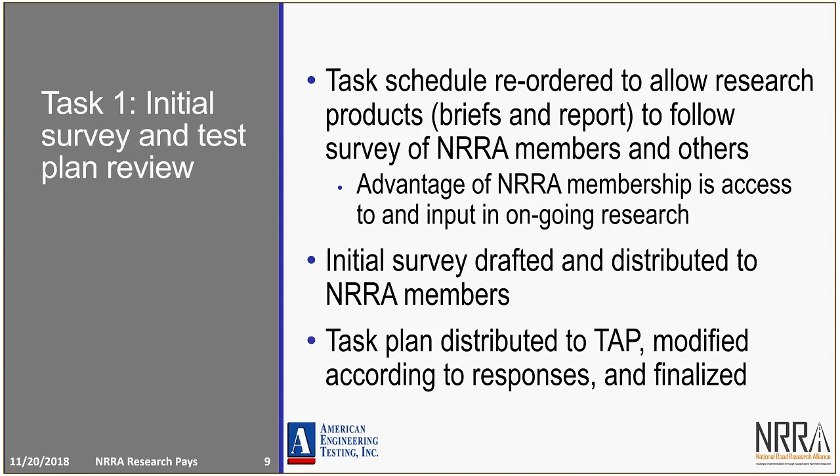During task one, we also performed a literature review looking at CCPR. A lot of the literature in this field is generally on cold mixes in general, and we wanted to be more specific. There's the Virginia DOT study, and we had to look at agency paving specs; Nevada was one of the first adopters of CCPR. We also looked at some industry guidelines, ARRA has something, and a firm in California called Pavement Recycling Systems was an industry leader in CCPR and cold mix technologies in general. They had some helpful documents, but there's not a lot that talks about CCPR from the ground up.

So we wanted to use this project as a way to build some of that knowledge base, with the technical briefs we'll put out later in the project and the final report.

Here you can see the test plan, which we ran past the TAP. We've built all our specimens and conducted the Hamburg wheel test. The other four tests are on the docket now, and we'll be proceeding with those this week and past the holiday. We should have finished results before the end of the year for all the tests.

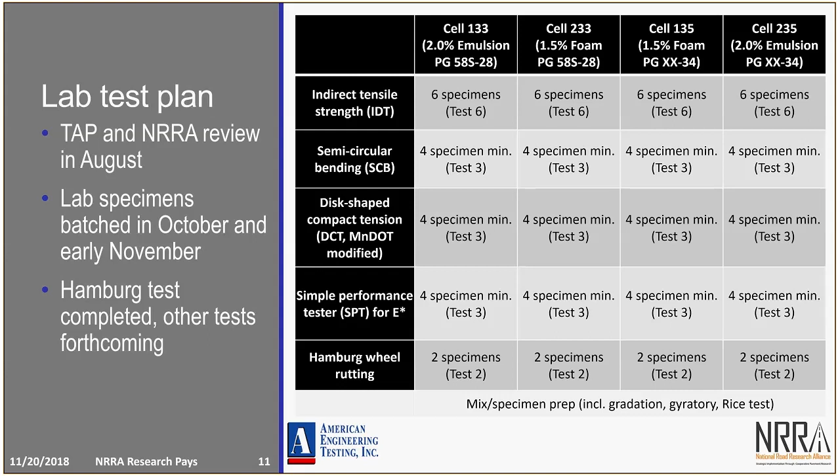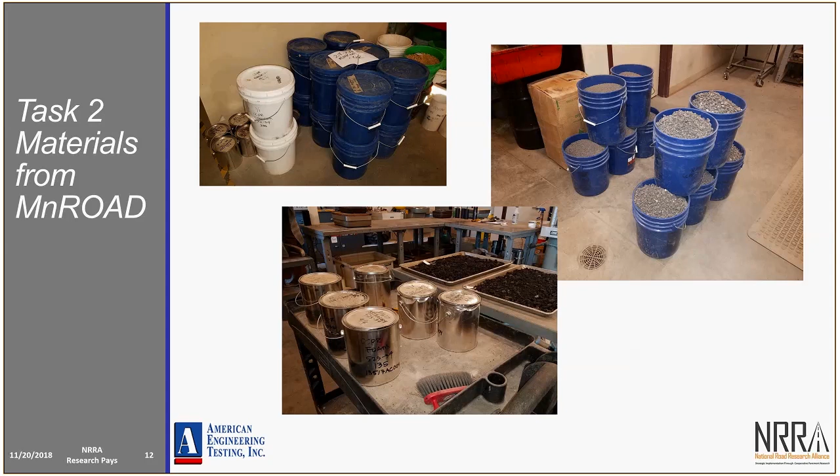These slides are mainly for the benefit of having pretty pictures, and also to reassure everyone that the work is proceeding. Here you can see gorgeous pictures of materials in our lab, and here we are prepping. We've got all our specimens prepped for testing, and here they are getting beat up on in that Hamburg wheel. And that brings us to the end.

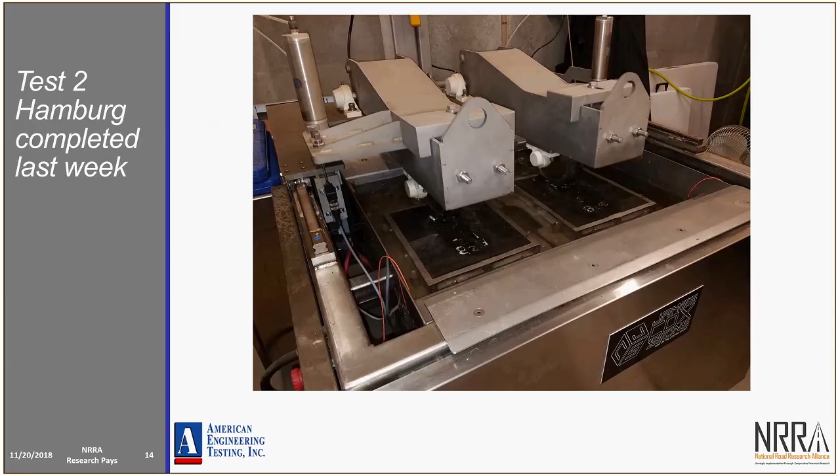If you have any questions, please ask them. Otherwise, thank you NRRA for your support, and thank you everyone for your time.

Thank you, Derek. Any questions there for Derek? I don't have any online, and I don't have any in the classroom. Dave, do you have any questions there? Anything you want to add? Dave Van Deusen? Not sure if you're available or not.

I think more will be coming from the study over time. It kind of points out the whole push for, as Eshan mentioned earlier and Derek mentioned here, that we do need some responses back to surveys if these studies are going to be up to their potential. Steve had a question about the timeline for getting all the lab work done.

Dave Van Deusen: Yeah, right now it's getting tested, so the Hamburg is moving along, and then we've got four that just go one after the other. So definitely by the end of the year, I can't say exactly when, but it's getting done. We're well within schedule; I think we had until sometime in fiscal year 20 to finish up the testing, so we'll be well ahead of schedule on this.